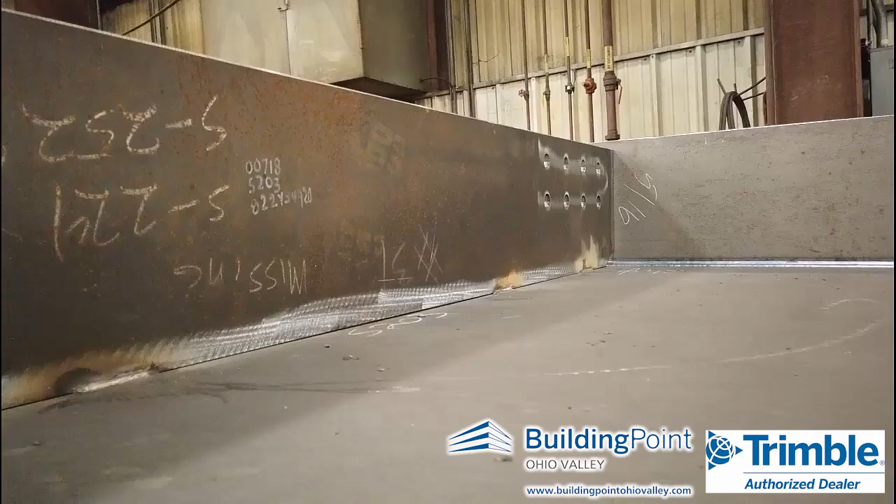Steel fabrication can be difficult and complex, but must match design. With Trimble FieldLink, you can not only lay out where the stiffeners and bolt holes are going to go, but you can also scan the object and compare it to the model, finding and documenting the as-built, and finding any deviations before it actually leaves the shop so you can fix it.

Scans are captured in less than a minute from different orientations. They are essentially a panorama picture, but behind that are millions of points that are well within about a 16th or an 1/8 inch accuracy.

Here you can see with FieldLink we've already aligned and registered these scans to the model. You can align the scans to the model with a resection or a 2-point control setup, or you can actually manually pull the scans to fit the model for a very quick and easy, I'd say, georeferencing.

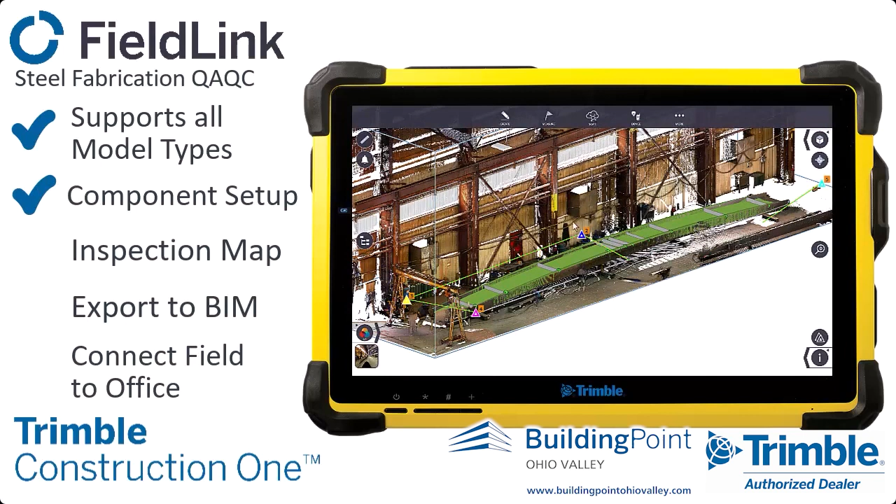Once you're in FieldLink, and this is the same tablet that runs our layout instruments to put in those stiffeners, you can, in the shop, actually do an inspection very quickly after essentially scanning and then aligning by just going to inspection. And then if we just look at only the beam, we'll bring that little section box in and run the inspection.

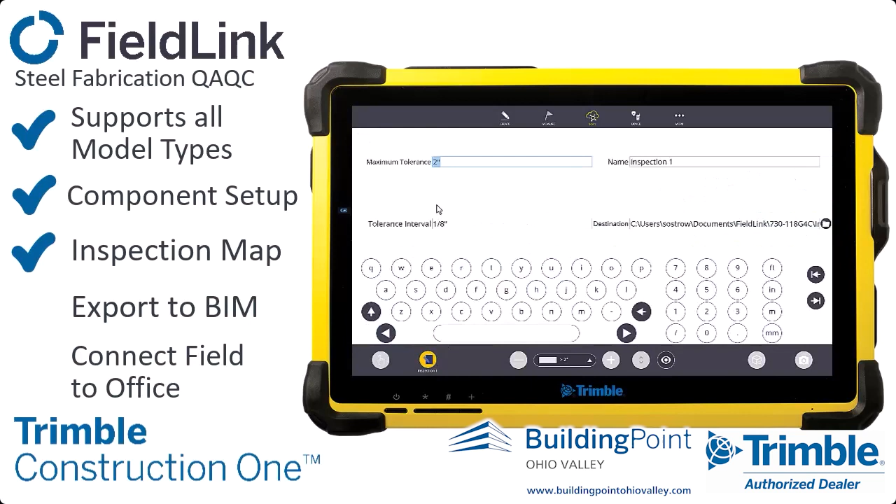Now, one thing to note here is as I turn off the solid view of the model, you can actually see where this beam is so heavy that it's actually weighted down in the middle. So on the left here, I have a little scale bar of how far away the points are from the model. I can actually bring that down even more so. And here you can actually start to see that's actually too much, because it looks like the center of that beam is sinking about 4 inches from the middle.

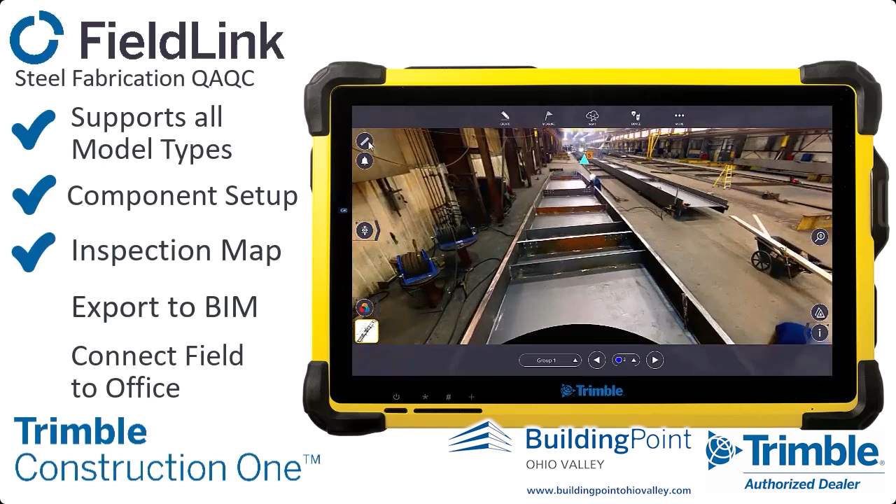So once I have this, I can actually use this to say my stiffeners are good. There's not much to be done about just the weight of the beam essentially stretching itself out, but I can confirm all the stiffeners are in the right location, and then I can do individual measurements from either the scan point or from actually the perspective here, where I can make sure my bolt holes are the distance up from the middle of the beam here as needed as well.

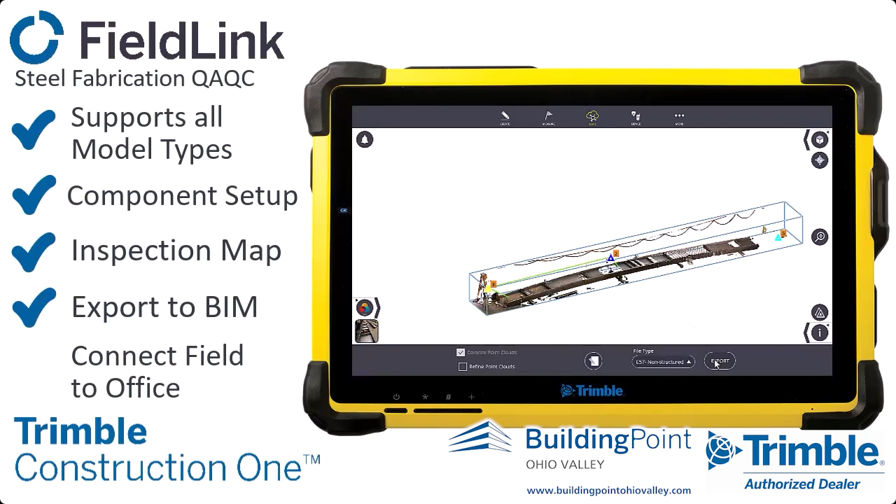So once I'm happy with that, I can check it in the field. I can actually export this data as an E57, either all the scan data or just a small section, or an RCP. If I'm going to Tekla, I would actually just send an E57 non-structured and then export that as well. So I would export it generally locally. I can have that actually uploaded to the cloud then later, or just send it on a thumb drive. So after I hit export, we'll move over to the PC.

So once the data is brought locally to the machine with Tekla, you can simply attach the point cloud by going to the point cloud tab here and hitting attach, and then just browsing to where that file, or the E57, is. You can bring in LAS, E57, TZFs, which are Trimble based, or TDX as well. Once you attach it, you're going to keep the location as the origin because you've already aligned it with FieldLink, and then keep the scale the same.

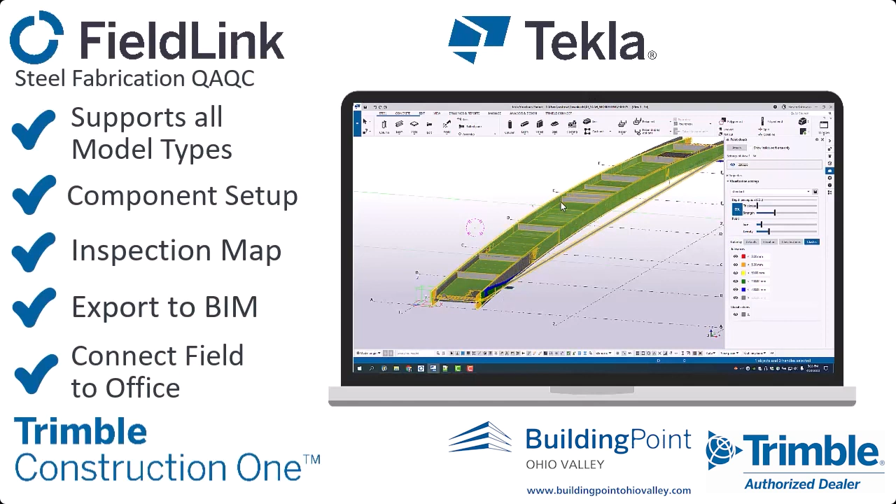The nice thing with Tekla is you can actually run through different visibility, as well as what we have here, clashing, which will actually colorize the point cloud for distance away from the model, and you can then update your model if you want to as-built it a little bit differently. You can actually move those components as well.

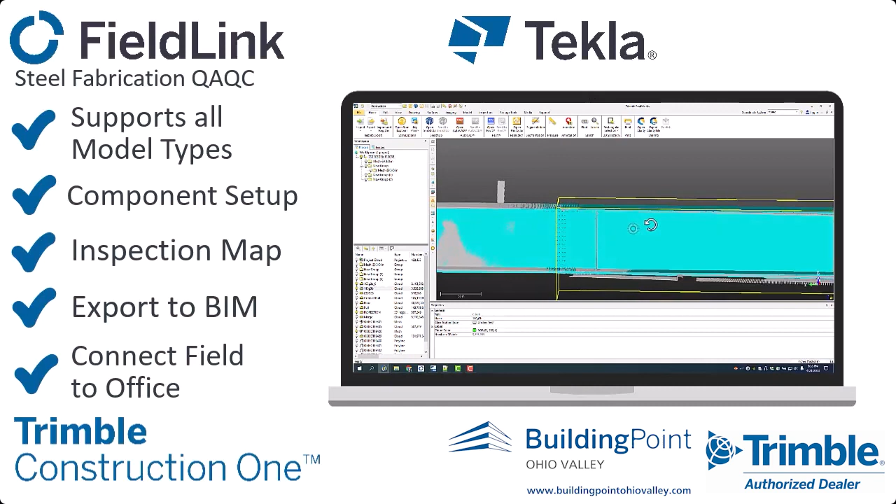So one of the other nice softwares that we have that will help with this is actually Trimble RealWorks, where you can actually here see an IFC model along with 2 different assembly components. One is actually on its side, the 103 assembly unit, and then we have the 110 next to it, where we're able to essentially move those together to make sure that our splice plate is going to be in the right spot, and even run an inspection to see if we have the ability to then cut these on site. So this is very nice to do with RealWorks too, where you can kind of dig into the point cloud a little bit more.

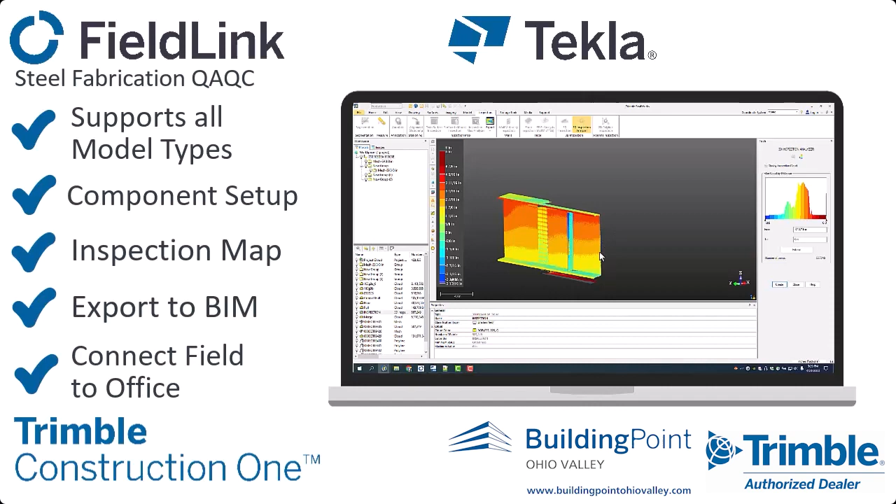So between RealWorks, Tekla, and especially FieldLink, you can ensure that your steel fabrication is made to design. Obviously the scanner can help with capturing the as-built of that facility so you can design it to fit. And then after building it, making sure that you build it to what you design is also very important.